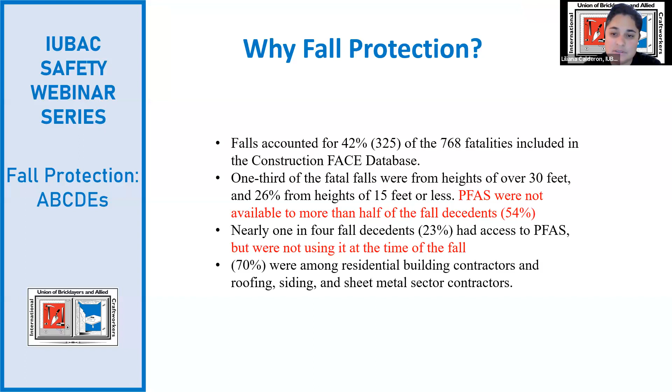I will begin with A, anchorage and anchor points. Required strength of an anchorage connector must be able to withstand a force of 5,000 pounds for each worker that is attached. It shall be independent of any other anchorages. You can have anchorage that can be either permanent or temporary.

I'd also like to note that the anchor point should be reachable without exposing yourself to a hazard. It should also be located to prevent contact with a lower level hazard in case of a fall. So you want to make sure it is well above your head.

The anchorage device provides a secure point of attachment, like an existing structure, for example, for the fall arrest system. This is a crucial component of the system, choosing the correct anchor point and anchorage to suit the working condition. The anchorage serves as a connecting point for the connecting device that we will be discussing later.

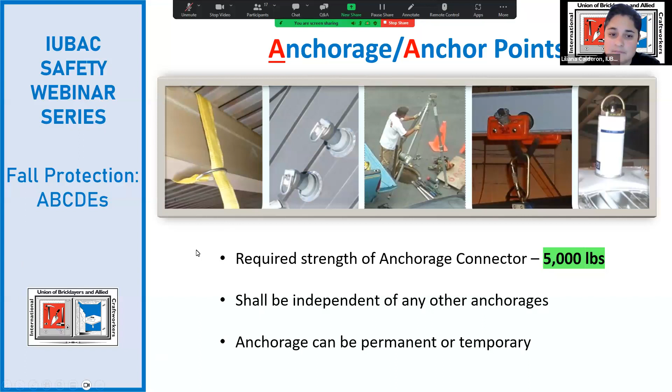These types of anchorage are temporary, used for specific tasks and then removed or moved to a new location. We see here on the left a choker anchor strap that can be used around beams. We do want to make sure that we protect the strap from the sharp edges of a beam that can cause the strap to be cut. We can use burlap, or they do sell beam strap protectors that go between the strap and the beam.

In the middle, we have an adjustable beam clamp, very easy to set up and use. And finally, on the right, we have a concrete anchor connector. The way this works, typically a 3/4 inch hole is drilled into the concrete, and then the device is placed in and it is set up for use. It can easily be removed and used again.

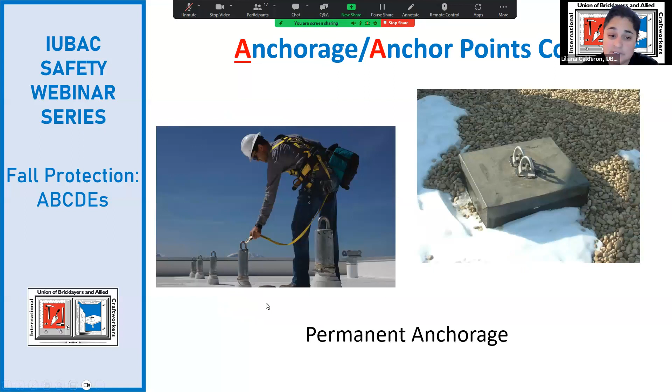I will now pass it on to Dave Donkin, who will go over the B and the C of fall protection. Dave. Thank you, Lily.

So we've moved on from A, we've talked about anchorage, so now we're going to head into B, which is the full body harness. As you can see in the picture are some different types of harnesses that you generally might see on a construction site. The design is to hold the wearer upright in the event of a fall from a height. It is also to distribute the energy generated from a fall across the wearer's body.

They come in various sizes to accommodate all sizes of people, including harnesses designed specifically for women. They may be specialized based off of application in industries such as confined spaces, positioning, etc. Also, a point to mention is the way that the harness is designed. It is designed to take the full brunt of the pressure away from smaller parts of the body and distribute that weight amongst bigger masses, body parts, etc.

The shoulders being one, the thighs, areas in which you have a lot more mass and are the larger bones in your body. That's the way the harness is designed, so that in the event of a fall, the harness is using those parts of the body that are bigger in mass to absorb a lot of the pressure when you fall into a harness. So it's across the shoulders, the pelvis, and the thighs, where we have a lot of that mass that can actually hold the weight from the forces in a fall.

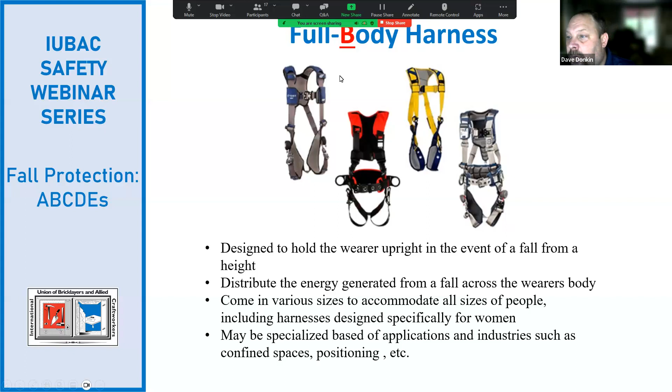Just as mentioned in the previous slide, there are different types of harnesses for different applications. Some of the examples are here: you might have a type A, which is for fall arrest connections, P, which is positioning, pole climbing, and form work. You might see these types of harnesses that have D-rings that are more on the hips or in the center of the chest for positioning to keep you in place.

Descent, D, for an emergency evacuation, E for exit, for confined space access, L for ladder climbing, and R for rescue, for tower rescue. There are some harnesses that are made which could encompass every single one of these types. You will be able to find that on the tag on the harness. When you're doing your inspection, the tag would describe what type of harness it would be used for. It would tell you the different types of applications in the type and name.

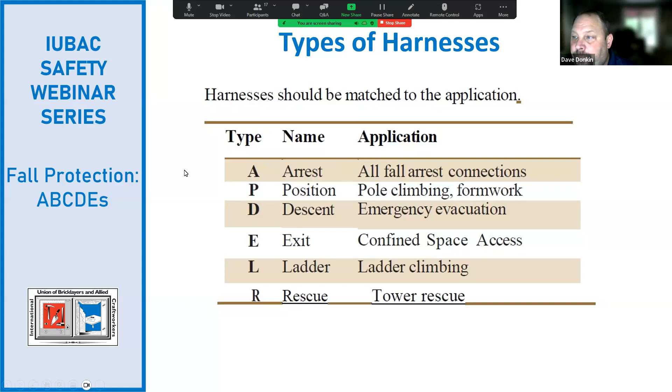And the reason why is because in the event of a fall, the D-ring, in the descent, is going to be somewhere up over the shoulders, even possibly above the head. And what happens when you go into a fall, if the harness was improperly worn, number one, you could almost slide right out of it. In a sense, it wouldn't even be worth having it on because it would be worn improperly.

Second is when you fall, your body momentum is going to push you forward. And we want that D-ring up above the top of your head because it's going to make you hang more vertically. If it was closer down to your waist, you're going to be hanging more horizontally. At that point, trauma is going to set in, and you're not even able to possibly self-rescue, because you wouldn't be able to get to your emergency straps, if you had them, or grab anything that was out in front of you because of the way that you would be hanging.

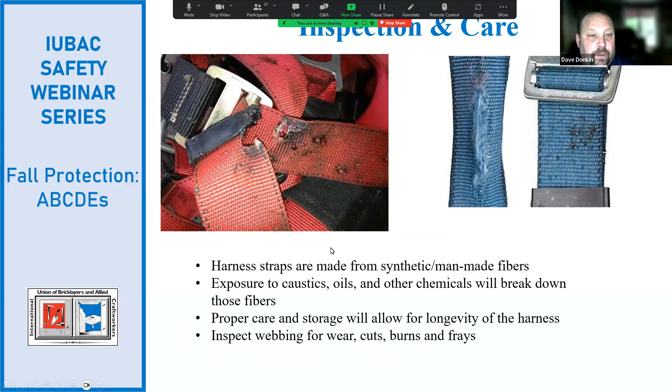And again, just like anything else, proper care and storage will allow the harnesses to last a lot longer if they're well taken care of. Again, inspect the webbing for wear, cuts, burns, and frays. It doesn't stop with the webbing. It covers all the components of the harness, any of the buckles, stitching, etc. So it's a fairly long process, but certainly warranted.

We're moving on to C. We've covered A, B, now we're on to C, and C is connectors. These are just some examples of different types of connectors. You have lanyards that come in 4 to 5 to 6 foot lengths. They are adjustable. They can come in steel, web, synthetic 3-strand rope, and they can come with or without the shock absorber. This picture right here is the self-retracting lifeline, mostly used for anchoring overhead, and also to minimize swing fall, and they retract when they're not in use.

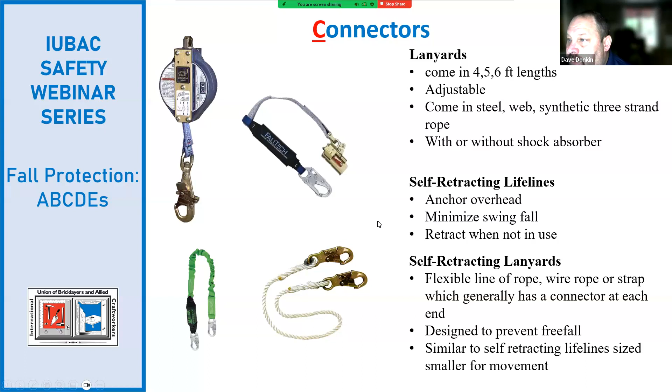The self-retracting lanyards are a flexible line of rope, wire rope, or strap, which generally has a connector at each end. They're designed to prevent free fall, more fall prevention, less fall arrest, right? They're trying to prevent you from free fall. They're similar to self-retracting lifelines, but sized a little bit smaller for movement and such.

Yep, I'll take this over. Gonna pick up from here, Dan? Yeah, I'll take this over. Gotcha.

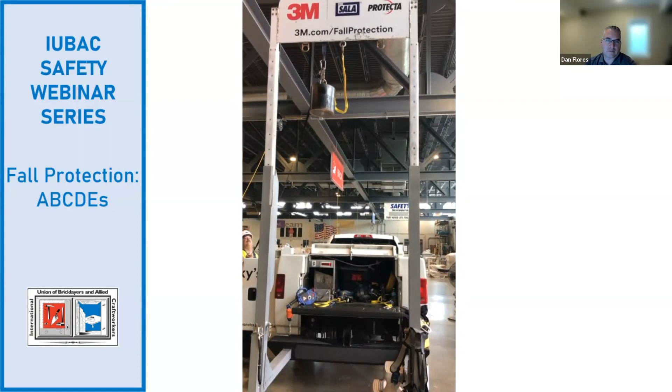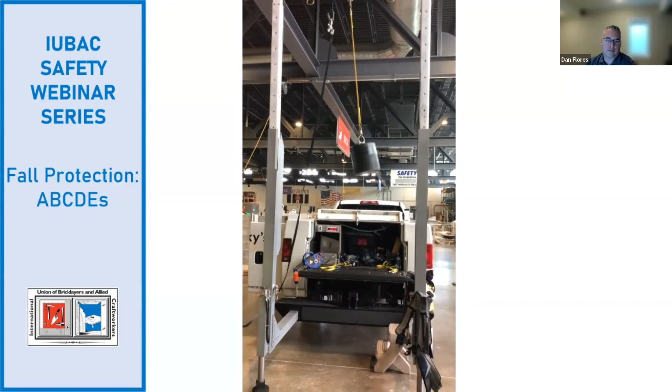I took the weight up halfway. How far are we going to free fall here? 2 feet. Even though you're allowed to free fall how far? 6. We're only going to free fall 2, and let's see what happens. So once again, here is our 310-pound guy in just a 2-foot fall. And I don't think I actually took that up halfway. I think it's a little shy of 2 feet, but doesn't matter. Here we go. Can you read that? 3,879 pounds just hit your body, whether you like it or not.

So this video really shows the force and impact the body will take in the event of a fall. Imagine falling the full free fall distance of 6 feet and the impact that would have on us. In this video, he only pulled up that weight 2 feet. We've already reviewed the harness system and components, including the need for inspection and what to look for. But what good is that if we have such a huge impact on our body? Next slide.

Fortunately for us, there's still another component to go over, and that is the deceleration device. The deceleration device's main purpose is to absorb or minimize the impact on the body in the event of a fall. This device can deploy to a maximum of 3.5 feet. So this extra distance is important to figure when determining the correct connectors, like Dave talked about earlier. If improperly calculated, the deceleration device won't have enough distance to deploy and could cause serious injury to the person in the personal fall arrest system. The deceleration device is always placed above the D-ring and not near the anchor point. Next slide.

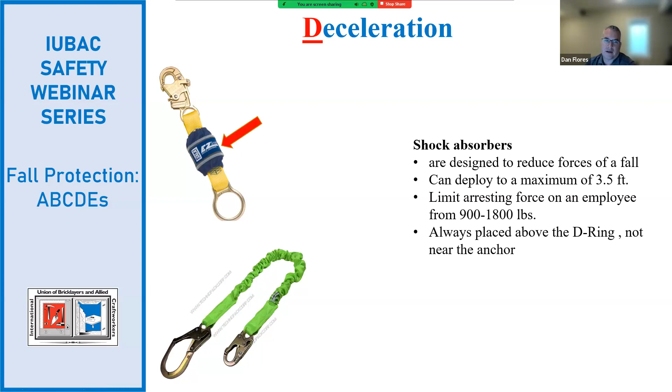With the impact shown here on this slide, these deceleration devices should be inspected daily and taken out of service if they have been previously deployed or stretched. Now let's take a look at the second part of this demonstration, this time with a higher fall distance and with a deceleration device attached. Next slide.

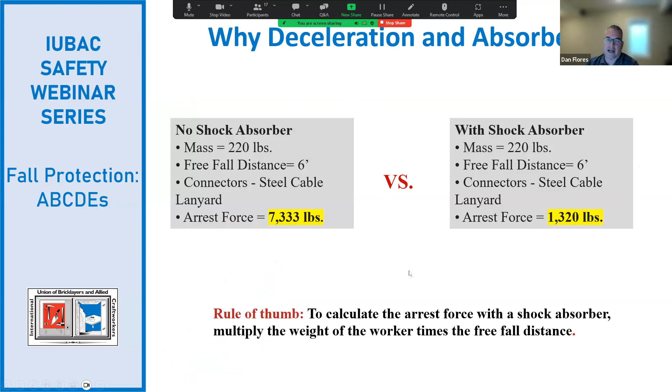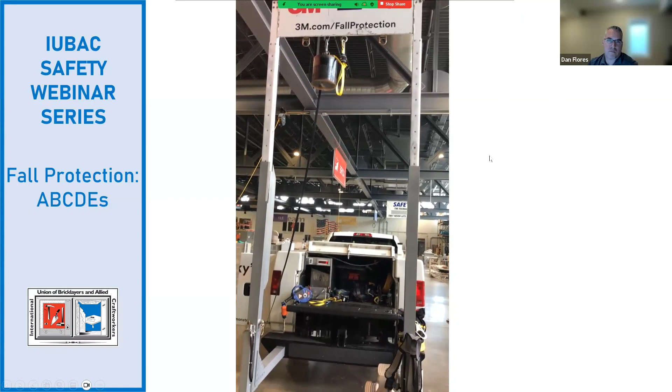Well, let's drop first. So, again, same 310-pound guy, but this time in a 4-foot free fall. And let's see what happens.

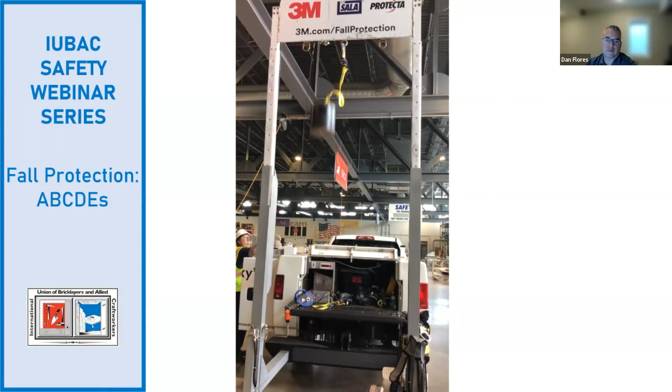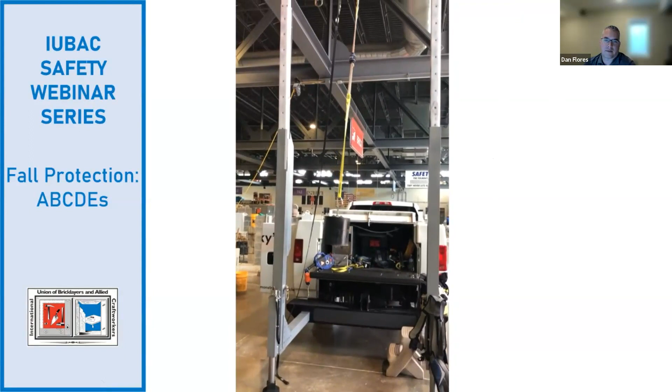You read that? We generated well over that 3,800 pounds of the first drop, but you're only left with 575 pounds. So we can see a huge difference to the impact on our body with the implementation of a properly working deceleration device. I think we can all agree on the importance of inspecting the personal fall arrest systems to ensure they are working in order for our safety.

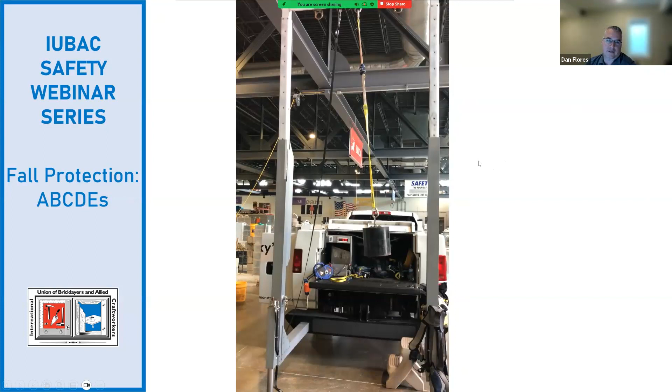Next slide. Under Subpart M fall protection, OSHA says the employer shall provide for prompt rescue of employees in the event of a fall, or shall assure the employees are able to rescue themselves. Suspension trauma is the development of symptoms and loss of consciousness if the human body is held motionless in the vertical position for a period of time. The danger begins when someone is unable to move for as little as 3 minutes.

So what happens if a worker has fallen and their legs are immobile? Well, gravity pools our blood into our legs. If the muscles are not pumping the blood upward, it pools in our legs. So you can pool several pints of blood into our legs and go into shock. After a few minutes, your brain goes for this last-ditch effort and tells itself, if I faint, I'll fall over and I'll get the blood back. So the brain assumes that if you faint, you must fall over.

If you stay upright without your blood pumping, your brain has no oxygen supply, your airway is at risk, and you'll probably die within 10 minutes. But how long do we really have? Well, it's tough to tell, and everyone's body is different. It could be 3 minutes, could be 30 minutes. It's difficult to put a timeline on deaths, however. So some research has shown that death can result in as little as 10 minutes, more typically probably between 15 to 40 minutes in a post-suspension fall.

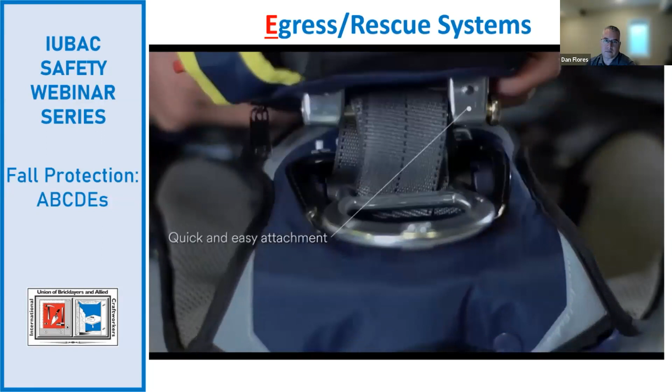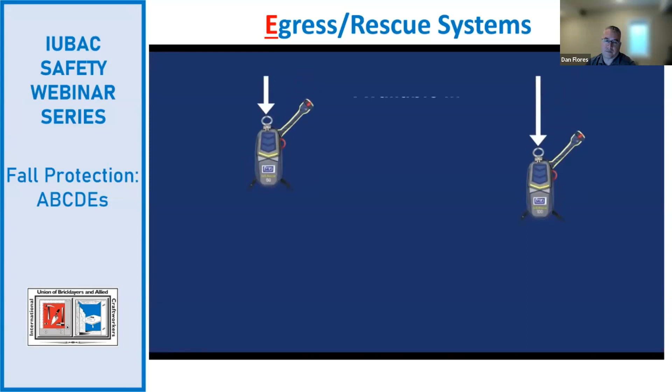Which brings us back to the importance of a rescue plan. This video demonstrates a self-rescue method created by 3M. Let's take a look. So we had nice, smooth descent. The individual in the fall was able to self-rescue himself, deploy up to 100 feet to the ground.

So with that, I'm going to turn it back over to Lily to go over some resources. Thank you, Dan. Thank you, Dave. I really hope that this review has helped in understanding the complete personal fall arrest system, giving you a better idea of what to look for when choosing an anchor point, where to place it, how to make sure the system is working properly, and how to care for all the individual components.